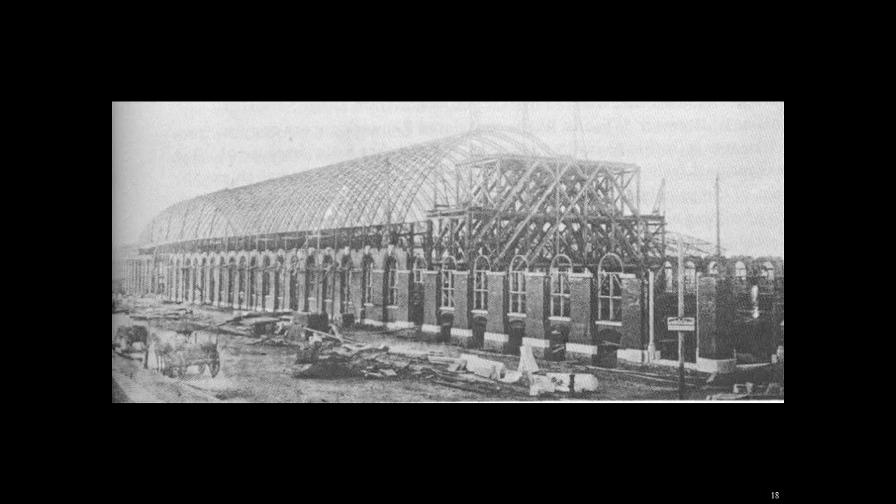Its basic form was meant to sort of mimic at least one of the main lines coming out of Paddington Station. So it was a conscious sort of copying of what was happening in the growth of the Industrial Revolution in the UK and Scotland, where things really took off the earliest and to the greatest extent. And he was exposed to that as a high school student in the UK, and then followed it further in his first jobs. So here you can see how light that early version of Grand Central Station actually was.

And you can see what it looked like a little bit for the construction and the false work as they were building those arches. So the gentleman who was the boss of this particular job is a New York architect, an owner at the time by the name of Peter Wight. And Wight was actually a pretty eloquent writer. And at the time of Root's death, talked quite a bit about and wrote quite a bit about John Root. They remained friends even after Root left his firm and had moved to Chicago after the fire.

And in Wight's writings and also in Root's own writings, they talked a lot about two men who were much discussed in architecture and engineering at the time: John Ruskin and Viollet-le-Duc. So we need to understand a little bit about what these men were writing about and what the debates of the time were to understand where Root sort of fell in terms of what he was trying to achieve when he designed structures.

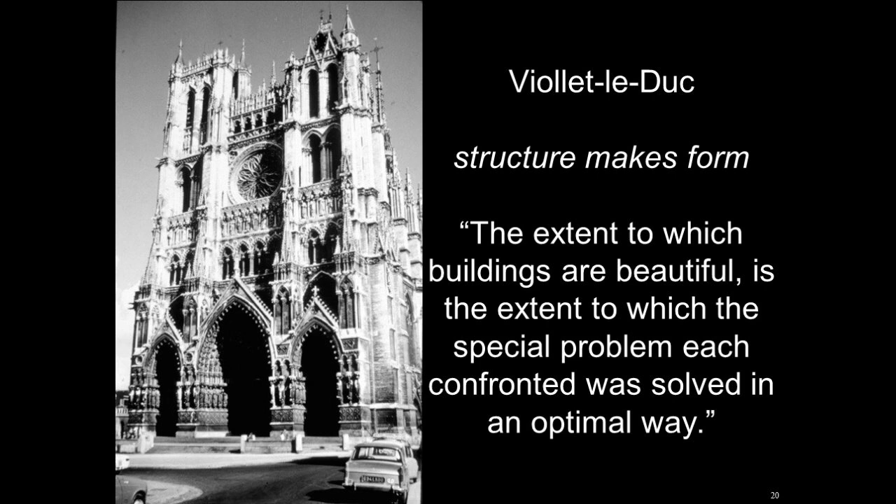Although when we look at Gothic cathedrals, we might find that a little bit harder to understand, there are details and evidence that have been done by modern engineers. Robert Mark at Princeton, John Ochsendorf at MIT, for instance, have studied the role of these little pinnacles that you see on the top of these masonry columns, or you see them out here with this sort of wonderful ornamentation on them, and have shown that there's a real substantial reason to put additional weight fully outboard on these masonry columns, because it makes a significant difference for the tensile stress at the bottom of the masonry tower to have this additional outboard weight. And it actually, under normal calculated wind surface conditions, makes a difference.

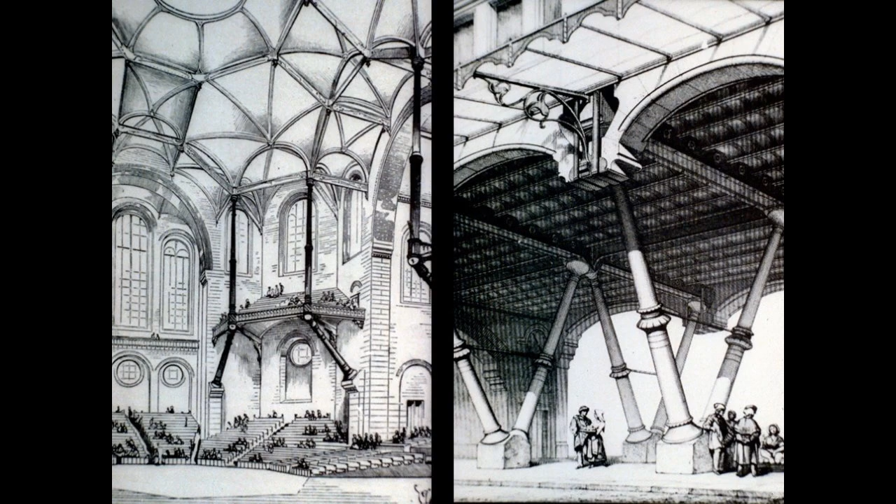And so this kind of thinking supports the ideas of Viollet-le-Duc that structure makes form, that even in a Gothic cathedral, the structure is very conscientiously making the form, and we now find that to be beautiful. He had other ideas as well, which were interesting, about how one could take the best ideas of Gothic, but then translate them into modern materials. Not that these ideas for cast iron columns came into churches or bridges, but these were his ideas and examples of how one should approach the problem of design, even when one is trying to build something that is Gothic. So you don't make a fake Gothic. You take the ideas that led to Gothic and you make a new structure.

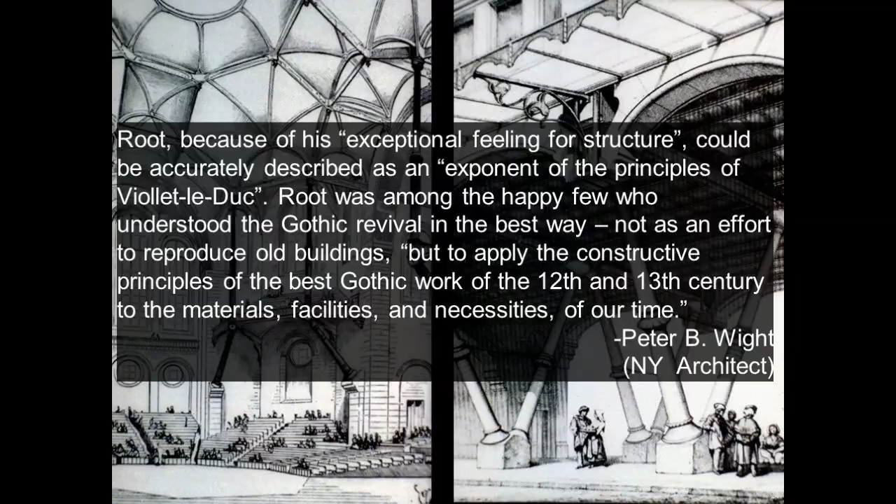And so when Peter Wight was trying to explain who this man, John Wellborn Root, was that had such a significant role in creating skyscrapers, he would comment that he had an exceptional feeling for structure and that he could be described as an exponent of the principles of Viollet-le-Duc. And that for him, Gothic revival wasn't about making things that looked Gothic, but to take the constructive principles and what one learned in the 12th and 13th century, but use them on the materials, facilities, and necessities of our time. So this is the man that we want to talk about, who would hear about the Chicago fire of 1871, choose to move to Chicago, and dedicate his life to building buildings in the Central Business District of Chicago.

We should be a little careful on suggesting that all of this happened really fast or that it was simple. The fire happened in 1871. For 10 years, the downtown Chicago area is largely dedicated to removing rubble. There are some slapdash buildings that go up, essentially nothing permanent. It's the early 1880s before any real buildings are being rebuilt in the Central Business District. So we talk about resilience today, and we're all, I think, quite proud of resilient downtown Chicago. But maybe we're not always honest with ourselves about the time frames it takes to really do some of these things. These are heavy lifts, and it was for them then as it would be for us now.

So what I thought I would do as we transition now from that kind of history lecture is to get a little bit more into the structural engineering and learn about what Root contributed. Look at some of his buildings. Burnham and Root designed an enormous number of buildings. This is a very small sample. We'll just pick a few and give you a sense of some of the innovations that they brought that would bring the skyscraper to life. And the first of those that I chose is the Montauk Block. A relatively small, I think it's 10-story building.

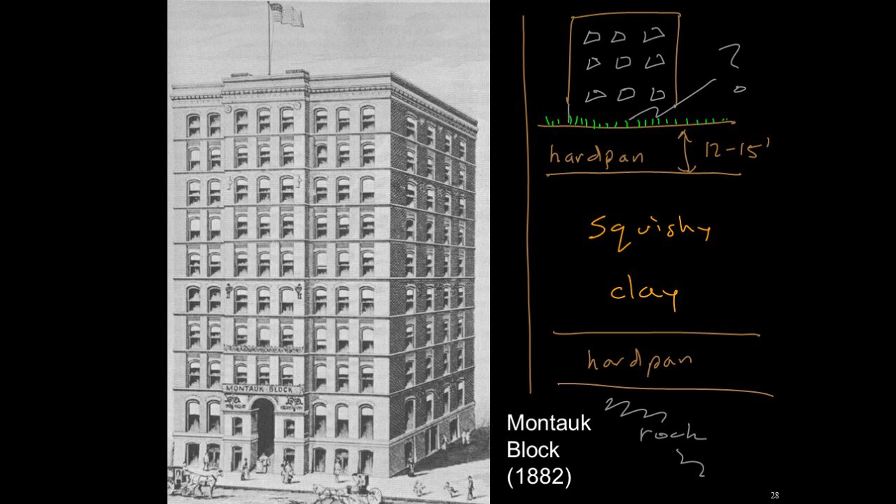The idea to solve this that Root came up with was that if he was to lay a grid work of railroad line orthogonally underneath the columns and then pour in concrete, he could create a foundation in a much shorter depth, which could be stiff enough to distribute the load out to the hardpan layer. And indeed, the first mat foundation was invented at Montauk Block, with the concept being generally credited to John Wellborn Root, and the engineer at the firm, Greg Ewan, being involved also in the patent and completion of that solution. So for sure, foundation changes were part of how they went up higher.

One of the other big changes, and this is from a diagram a few years later, it's not the Montauk Block, was to figure out fire protection. So you would think after this huge fire in 1871 that they would take fire protection very seriously. And they did, right in, I think it's '77, they build a relatively small 4- or 5-story building called the Grannis Block. Like all of these buildings, they're cast iron interior columns, and then all of the exterior is load-bearing masonry. And they put these terracotta tiles all up and down the interior columns. This one says steel column in the drawing, but that wouldn't actually be true for a number of years still. They were still cast iron at this point.

And this was even actually the first home of Burnham and Root's business, the Grannis Block. But in 1877 or '78, I have to look back at my notes, but I think it was '77, there was a fire at the Grannis Block in their own building, and the building is totally destroyed. But the only thing that's left in the rubble of the building is the columns. The columns are totally fine. They got this terracotta proofing, but they're on the ground because no one thought anything about fireproofing the floors in any way. And so one of the first buildings to have fireproof floors, and they used these plaster tile arches between the beams, was actually the Montauk Block. So this simple building already had quite a bit of innovation in it.

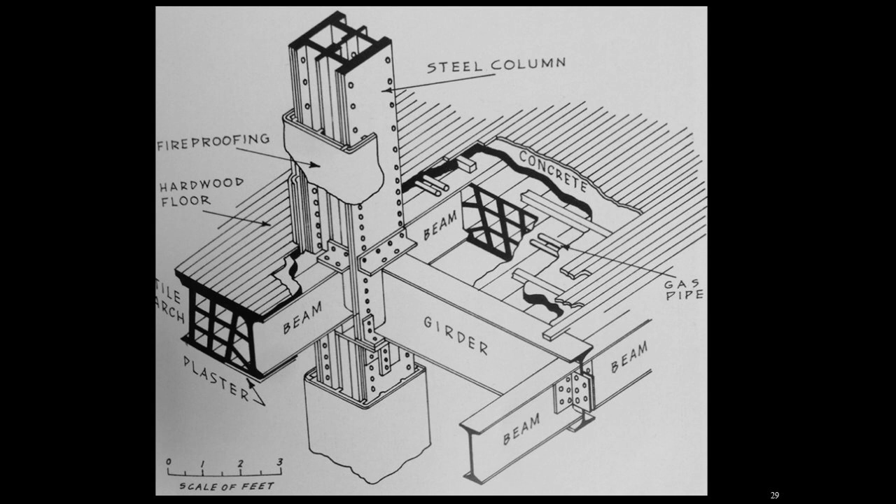In this building, Root is frustrated in his own writing about the final form. He's designed a number of buildings at this point. He wants to impress. He wants to create a building that will give you a lasting impression of importance, but he doesn't want to be neoclassical or neo-Gothic or anything. He has these other ideas, and he struggled greatly with a number of different structural expressions, and was not actually totally thrilled with the external form of the Rookery building. But it was details that he managed to achieve in the interior of the building that had a lasting effect, and that he was indeed happy with.

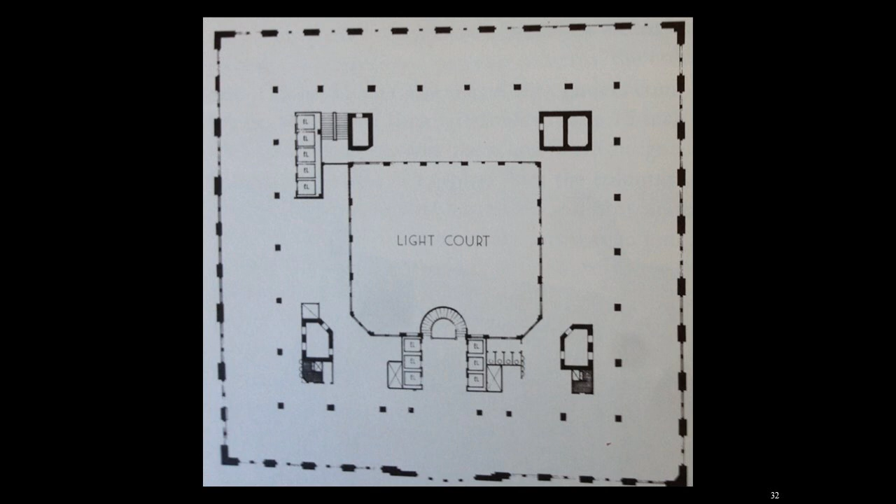And what did it look like? To the eye of someone in this time, in the 1880s, the interior of this building would have looked very strange. Architectural critics now agree that this was the first direct expression of the sort of orthogonal beams and columns of an iron, in this case, later would be steel, skeletal structure. It's only on the interior columns because the exterior is masonry, but we can see, for sure, that very simple expression of these are the beams, these are the columns, these are the windows, that's it.

You'll also notice this kind of interesting idea of having the staircase totally separate from the building. This spiral staircase is actually inboard into the light court and is separated from the building. In the 1960s, the Inland Steel building in Chicago would win major awards and accolades for doing the same things with its elevators. If you were to come down to the base of the light court, so basically the first story of this building, then the building would be complete, and you can be in this space.

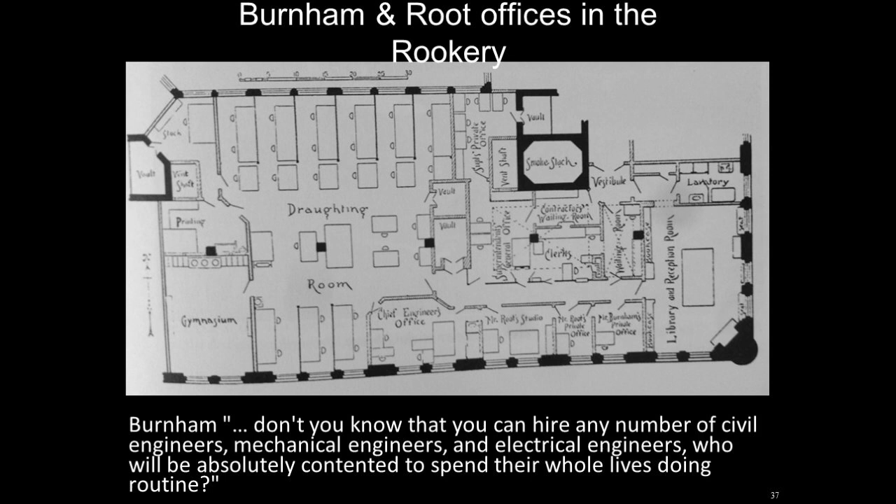That quote came before Burnham actually himself tried to design a hotel roof in Kansas City that would collapse during construction, a sort of lightweight steel joist type of roof that he didn't fully understand. And at least later in his life, he came to appreciate the limit of his powers and what the engineers were providing. But you can certainly see that that wasn't always his thinking.

A couple more buildings that we want to talk about under the design of Root. And it's the Montauk building we look to next. And this is the building that architects generally turn to first in trying to explain what the first Chicago school is all about. You can see that the building is very simple now. It has none of the sort of classical features.

Early tall building design, in looking for a precedent for how they should make the building, was very focused on the classical orders for columns. And so they would try to make a building have a sort of a base, a shaft, and a capital. And the base would have some kind of ornamentation. It could be any of the sort of classic orders, and then a shaft section where things would be the same, and then a capital that would be at the top.

Root wasn't satisfied with that idea. He felt that it created something that was a bit artificial, and he wanted to look in other directions. And the folks that were actually investing and building this building at the time wanted the tallest building in Chicago, and he had a great idea, and his idea was that he was going to design the building completely out of steel. So I'll just show you.

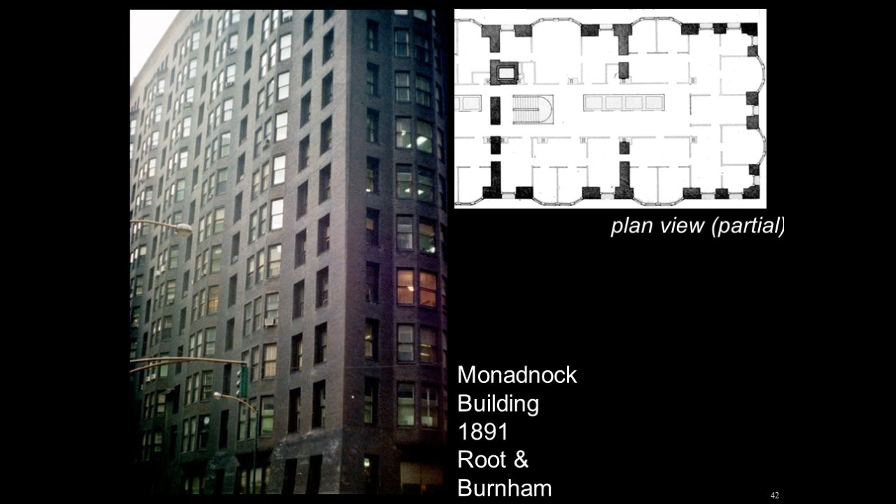So a brief moment to talk about another building before we go back to Root, to talk about William LeBaron Jenney's Home Insurance Building. You would often find folks that would say, and I think it was reasonable evidence, that this is the first skeletal steel or skeletal iron skyscraper. The Home Insurance Building was the first building to actually use iron columns on the exterior of the building as well as the interior. Still, the facade was covered with masonry. You can see a small piece of it here. But the bulk of the columns were cast iron.

I say the bulk of the columns because our own Charlie Carter from AISC had the benefit of talking with some folks that actually gave him a small sample of an upper floor of the Home Insurance Building when it was under restoration. And there's evidence that there was some steel that went into this first skyscraper. And there's a wonderful Modern Steel Construction article that Charlie wrote that you can look up to learn a little bit more about that story.

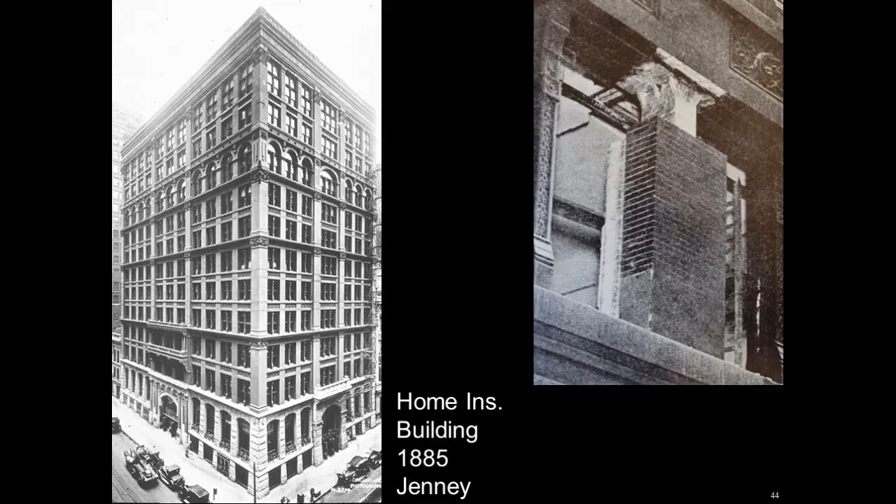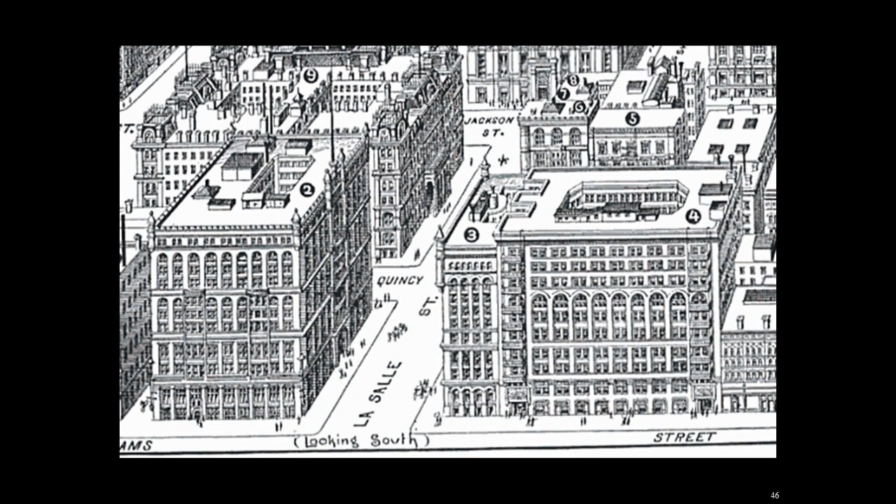The first building that's skeletal and steel actually happens very soon after this, and that is the Rand McNally Building. It's no longer existing. It's been destroyed, so we just have simple pictures of it, designed actually by Root. So you can see in this drawing a couple of buildings. The one with the number 2 on it is the Rookery Building. The one with the 3 on it is an existing building that's next door to the building with a 4, which is the Rand McNally Building, which is the first steel skeletal skyscraper building.

And there was a significant problem in that you couldn't easily get the load of the new Rand McNally building into the ground because the foundation of Building 3 already used these sort of cut stone pyramid type of solution and was taking up a huge amount of space. And so this building actually has one of the first large-scale transfer girders in it, a foundation girder. But even still, the weight was really significant.

And one of the things that happened in the transition from cast iron columns to steel riveted columns was that, based on the understanding and reliability and certainty of our ability to predict the forces and the capacities of those columns, the general safety factor on direct stress switched from 8 for cast iron columns to 4 for steel riveted columns. And so the self-weight of the building halved because we changed the safety factor in half. And then the self-weight of the building halved again when we removed all the masonry.

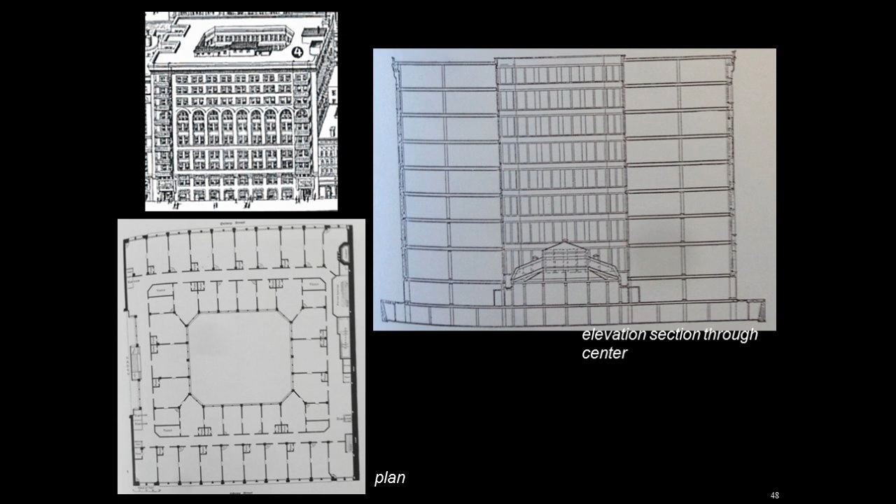And to add a little bit to that, let me give you a quote from the Engineering News Record, just called the Engineering Record at that time in 1893: "The construction of skeleton buildings has but recently been commenced, hence but little opportunity has been afforded to test them in the face of ordinarily destructive winds. As a general rule, however, it may be considered very indifferent engineering that is fortified only by a lack of failure. If the construction is sound in principle, it can be shown to be so, but if its character is not capable of a clear defense, it can only be regarded with well-grounded suspicion." So the engineer as skeptic has always been important to us, and we were right to be skeptical.

The load-bearing system for wind was essentially the gravity weight of the masonry, which we removed in these steel skeletal structures. And so we needed to replace it with something to resolve those large wind forces. And there was a great deal of innovation that would go into that. You would see all sorts of different types of rod bracing, knee bracing, portal frame bracing, a number of different solutions that would be tried and used.

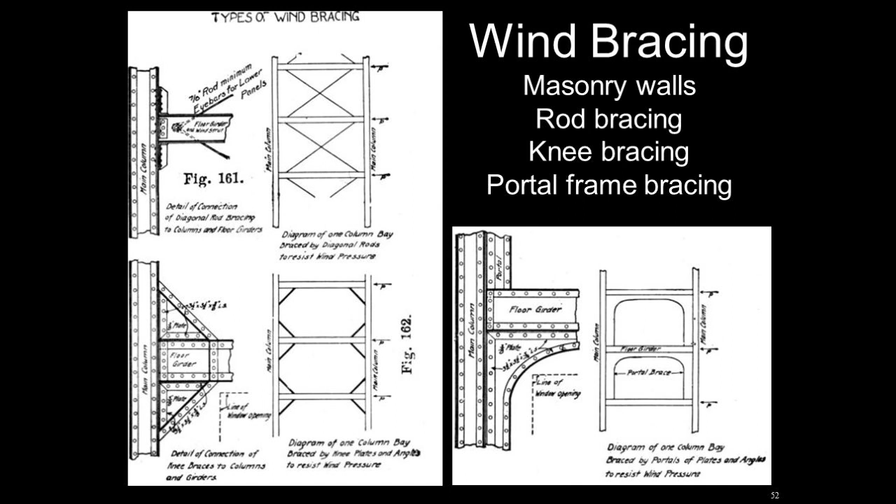Root wrote about and in favor of the use of rod bracing as an excellent solution, and he got involved very near to his death in the design of a building that was going to try a different type of resistance to wind, what we now know as a moment frame system. Unfortunately, he died before that building was completed. And so we only have his initial ideas and designs, and that building would actually be completed by the firm of Burnham and Root.

But now there would be new players such as the engineer Atwood, who would be hired and would generally be the one that would finish the Reliance building. But in the Reliance building, coming from the firm of Burnham and Root, starting with some of the ideas from John Wellborn Root, we come to really the conclusion of what the first Chicago construction could look like.

So here you see an older picture, 1895, with Burnham's firm working with Atwood and also Shankland as the engineer. And we can see in a modern picture really how light this building is. So some of the architectural features known as the Chicago window, you see the very light windows. You see something very similar to the interior light court of the Rookery building, but now being expressed as the exterior of the building, because there is no load-bearing masonry. The entire structure is now skeletal steel construction.

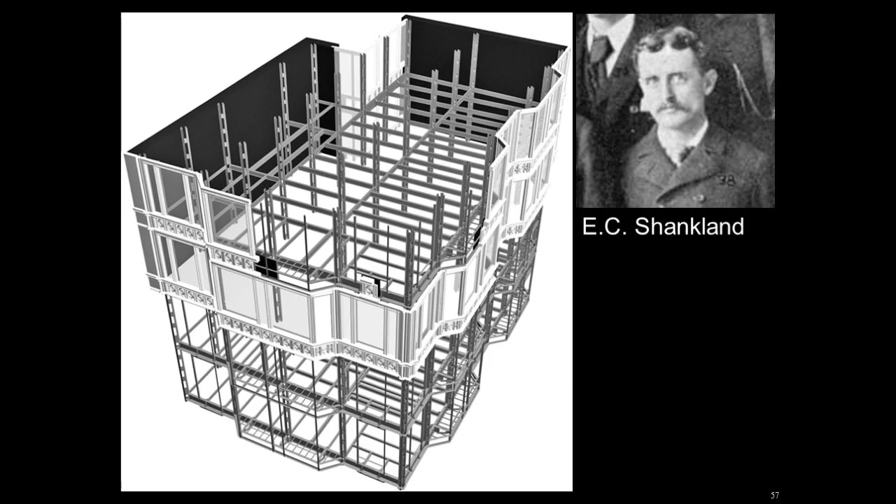They didn't have a name for this moment frame construction at the time. And the descriptions in their own words at the time, how do you describe what they're doing, they would look to carpentry and they would describe the idea of table leg design. So when you would put a kitchen table and you would put the leg on, there's a number of different ways to make that a stiff connection, but there's a type of design where you essentially make a full, complete moment connection between the top of the table leg and the bottom of the table. And so with cast iron solutions, that sort of detailing looks something like the modern day rendering that you see here. And the detailing of that connection is credited to the engineer Shankland.

And so Root's involved in the whole creation of the skyscrapers, the conversion to steel skyscrapers, and even the final, this is what Chicago School brings us in terms of all steel skeletal construction, and the most efficient form at the time for building the high-rise skyscraper. So just a few words about Root and a kind of brief denouement.

One of the reasons that I choose to use Root to tell this story is because his writing is very sympathetic to an idea that is now known as structural art, and that is the notion that the highest form of structural engineering, one that fully embraces the social, scientific, and symbolic constraints and achievements that you're trying to solve in that one particular engineering problem, generally leads to something which is simple and in its simplicity beautiful. So it's not simple and brutal, but simple and elegant. And so that is a branch that exists in architecture as well.

And Root is trying to make it clear that when something is providing an important structural feature like a column, it should be expressed as a column and nothing else, and that things should be simple, they should be direct, and there should be a sort of moderation in what you apply. And so with those writings, we firmly ensconce Root in the camp of that simplicity, directness, and moderation.

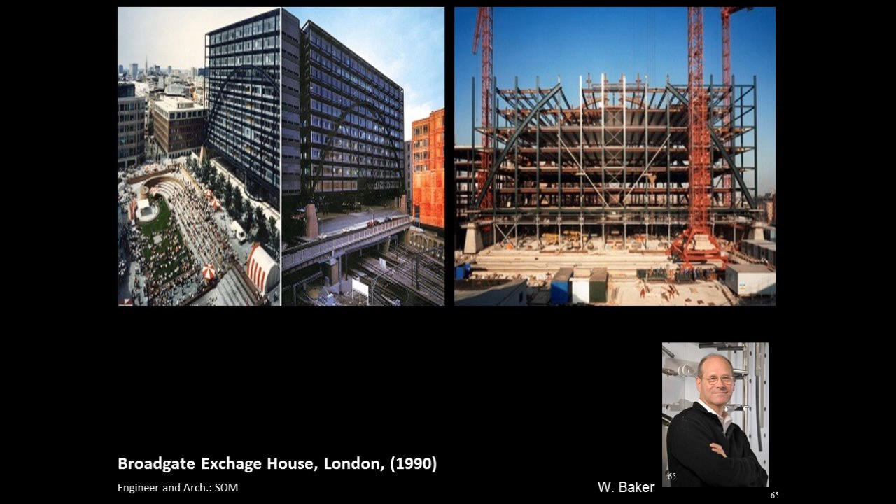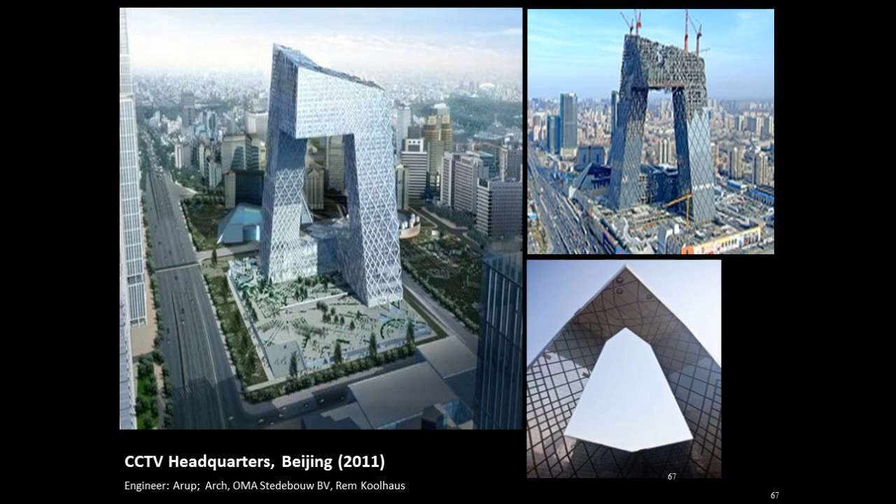Or you can see a more modern example in the CCTV building, which tries to put forth a notion of being efficient and optimized in its steel structural solution, but the overall form was chosen in a way that the efficiency was impossible since you're cantilevering out enormous weight from a huge building, and so you're not really taking the problem under its full constraints. You took a sculptural idea and you realized it in steel, but you didn't actually solve the functional issue in an efficient way. But with that, we can come to our coda.

And two final words about our hero, John Wellborn Root, and the birth of the skyscraper. I would first leave you with the historian Carl Condit, who wrote a nice piece about Root, and he's suggesting that his creative powers in structural engineering match those of the artist. And I would like to promote that we can say that about all the best structural engineers. And we shouldn't be ashamed to. We should be excited to say that there is enormous art in solving difficult structural engineering problems, and our best structural engineers are indeed artists.

And then a quote from Root himself, which I quite enjoy, which is the notion that it's like any difficult problem. You know you've solved it when you found the simple answer. Finding a complex answer that sort of works is relatively easy. But the simplest arrangement is hard, and it's best fit to our greatest buildings.

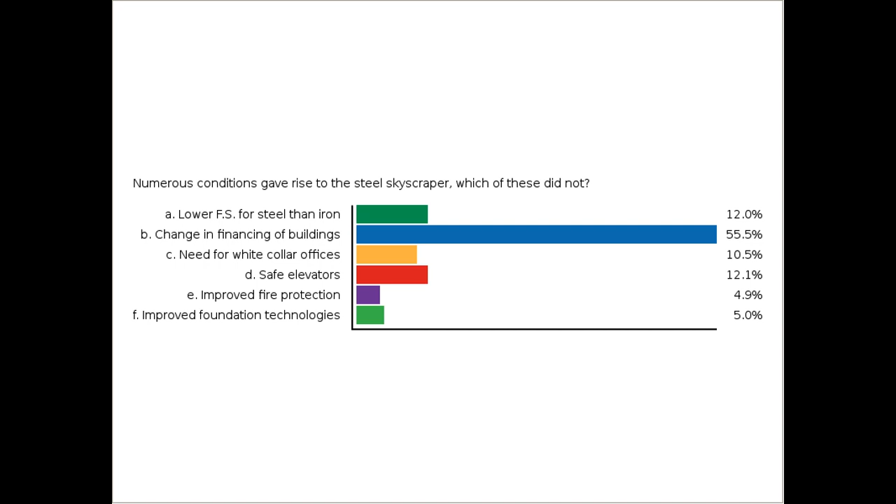Give people a few more seconds to participate here. Let me read that again. Numerous conditions gave rise to the steel skyscraper. Which of these did not? Lower safety factor for steel than iron. Radical change in how buildings were financed. Increased need for white-collar office space. Safe elevators and improved fire protection. Or improved foundation technologies. All right, last chance to get your answer in. Okay, I'm going to close the poll here.

And Ben, about half of the respondents said B, change in financing of buildings. Is that correct? Yes. So that is correct. That was one thing that didn't see any radical change over this time period, and so we should be happy. And it's a good question if I fool some of the students, so I'm happy as a professor because I didn't make it easy to get the A. So everyone should be happy. But the rest, A, C, D, E, and F, all did indeed happen.

Great. Let's answer some questions with the time we have left. First question: is there a standard or design manual for cast iron columns and beams from the 1800s? That is an excellent question. There certainly were manufacturer-produced guidelines that would come from the producers. To my knowledge, I don't know of any organizationally created standard at the time.

And I know that the architects and engineers that were designing these buildings met weekly in kind of clubs. And I understand from looking at some of the minutes of those clubs when I was researching some of this work that they did discuss those. Those were items of discussion at those meetings. So it's quite possible that they were more discussed practice as opposed to settled law the way we do it now.

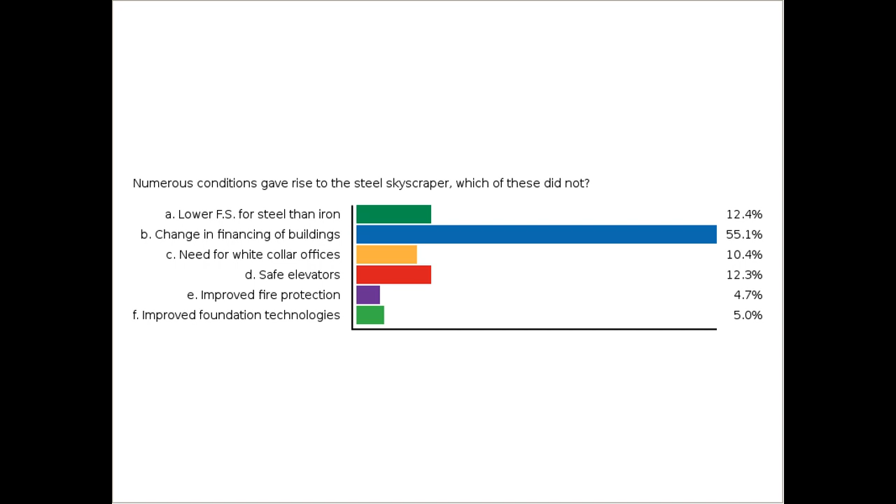Okay, let's see here. I'm trying to find the slide. There's a question about the Rand McNally building. Here it is. Yeah, good as any. The question is, what exactly happened to the Rand McNally building? Progress. Destroyed and replaced for a taller building. So nothing too exciting.

It wasn't known at the time as an important building with regard to its steel skeletal nature in any specific way. I believe the first time that it was unearthed and the timelines were put together was by a historian actually here at Hopkins, Daniel Hoffman, that wrote extensively and made the argument and figured out the timeline of the buildings, that this was really actually the first building that was skeletal steel.

Okay. I guess back to a question of how these early buildings were designed. Were there any kind of calculations that were generated as part of designing these skyscrapers, and were they required by the authority having jurisdiction for review? Yeah, we live in a different time now, a different world, don't we?

There were drawings. There were calculations. I don't know, and would need to confer with others to understand exactly how the regulatory environment of the Chicago Building Code was post-fire, to tell you exactly how that would have been approved. But it was completely a local affair, right? This was Chicago's business. It wasn't structural engineers' business or the nation's business.

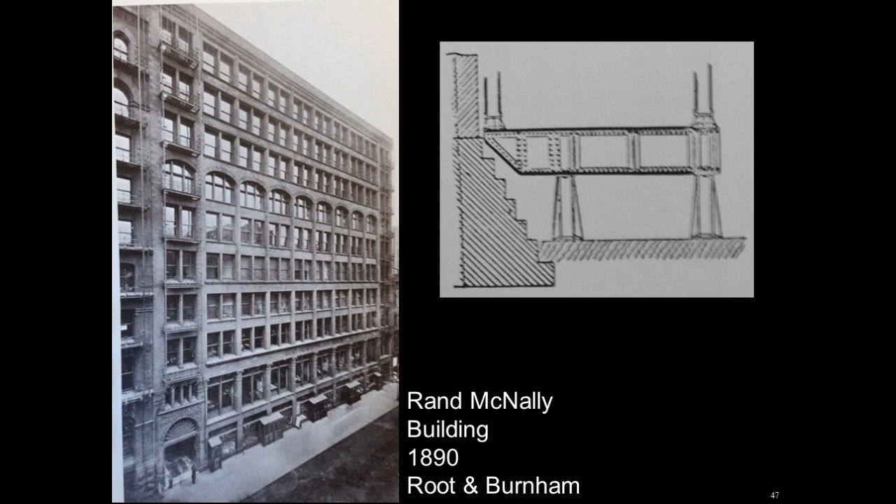Okay, a couple more questions. We'll wrap things up. I'm going to butcher this, the Montauk building. The question is, this was built in 1883 but was demolished in 1902. Do we know why it was demolished in such a short span of time? I actually don't. I don't know the exact reason why it was

just demolished and rebuilt. We can say the number of buildings that survive from the 1880s to 1920s time is actually relatively small, because there's so much more reconstruction and we can go so much taller. So once they figure out the steel skeletal skyscraper, they're really cooking through the 20s. So the building that happens in Chicago up through the Great Depression is enormous, and they're building and rebuilding,

and it's a huge amount. And then just after the Great Depression, there's nothing built in Chicago for a very, very long time. And so I think there are a few like the Rookery and Monadnock which have stood the test of time. But Burnham and Root commissioned hundreds of buildings, most of which don't exist now in Chicago.

Okay. Last question, just looking for your opinion. Which of these historical steel skyscrapers lands as your favorite? The interior of the Rookery is just incredible, even after the Frank Lloyd Wright stuff, which is beautiful in its own right. So if you could only visit one of what I showed today, even though it doesn't meet perfectly the simplicity, directness, moderation type of mantra, it speaks to a time and an artistry that I really appreciate, and I find it quite gorgeous.